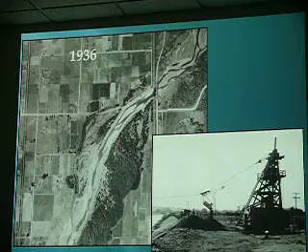And gravel was part of our flood problems. In 1985, there on the left side of this graphic, you can see we had a channel capacity of about 16,000 cubic feet per second. But in 2011, you can see we've only got about 7,500 CFS, cubic feet per second, of capacity for floodwaters. And each year, we've been monitoring this. We survey the channel cross-section, and it's filling in. And so we're losing capacity, and that was certainly evident in what happened in January of 2009.

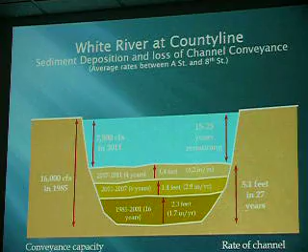And if we don't do anything, and we look at what the existing conditions are for 15,000 cubic feet per second, that's a 100-year flood event, or what we call 1% annual chance flood, we could have water all over this valley, and that's what this graphic shows. This is output from some of our computer modeling that we do in floodplain analyses. You can see that the water would spread out just about everywhere. So that's our current flood risk that we're dealing with.

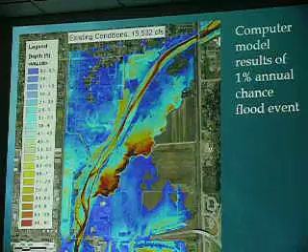And of course, a lot of you went through that flood event in January 2009. There was significant flooding through White River Estates, over 100 homes affected, the Pacific Park area, 4th Avenue, 8th Street, or Stewart Road was also overtopped, and there were some evacuations and rescues there along Butte Avenue and Stewart Avenue.

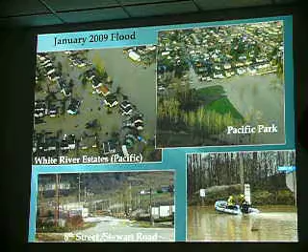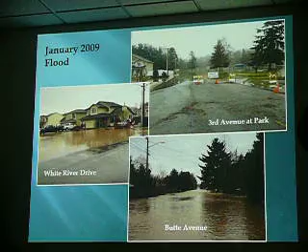Other roads were flooded, 3rd Avenue at the park, all the way along Butte Avenue, that's actually looking south toward Pierce County, and again, all of White River Drive. So these are the types of flood damages that our flood control projects are seeking to address.

Current assessed values of those homes are $52 million, and we made an assumption about contents, and that's another $13 million in damages avoided by the implementation of the County Line project. But as I mentioned, the sediment still comes, and we have to plan for that. We have planned for that in our project.

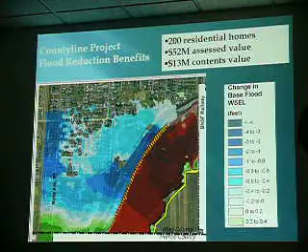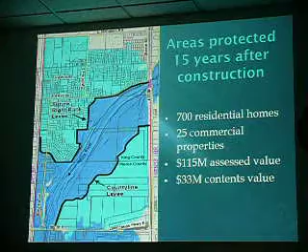So another element about the County Line project that I want to emphasize here is that it has significant flood protection, but it also does a lot of good things for habitat. As I showed in that 1936 photograph, there's a lot of dredging going on, channelization, and as a result, the wetland area and floodplain areas were disconnected from the main channel of the river.

By setting the levees back, we actually regain rearing habitat for spring chinook and steelhead, and in particular, spring chinook is a very important listed species for recovery in the Puget Sound area, and so the White River spring chinook is quite unique and important. Because of these environmental benefits, we also have gotten a lot of good support from funding partners, and I'll talk a little bit about that a few slides down here.

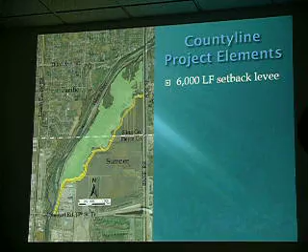And another important thing, again, is the sediment deposition. Opening up the river and giving the sediment someplace else to go rather than just deposit right in a constricted channel is a way to manage sediment and provide storage for it. So I'm going to go through a few components here about what the County Line project is about. Shown there in yellow is the alignment for nearly 6,000 lineal feet of setback levee.

We will also be adding 5,000 lineal feet of what we call bio-revetment along the front edge of that levee. That's for erosion protection, so the channel doesn't migrate into the levee. We also have engineered log jams, that's ELJs. We have 4 of those that are sort of incorporated into the bank with the bio-revetment to help deflect erosive flows. And then we have 4 others, we call them apex ELJs.

Those are the black dots you'll see at the upper end there in the green shaded area. And those help to split flows, slow down velocities. It also is a way to help drop out sediment that will locate behind those engineered log jams. Then we have to go in and actually remove the existing levee.

So the existing levee area is shown there in blue, and that's about 4,500 lineal feet of levee removal, and I think about 30,000 cubic yards of material that we'll be pulling out of that area. And that's just another aspect of taking out that artificial fill that's near the river channel and pulling it out of the way. So again, it opens up, provides room for more sediment to drop out, and actually lowers the flood elevation.

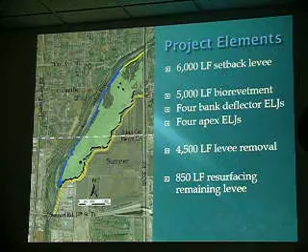And last but not least, at the upper end, shown in yellow, near the Burlington Northern Santa Fe Railway embankment, we'll do about 850 feet of levee resurfacing. Again, this resurfacing is to ensure that that part of the existing levee stays in place, so we don't have an uncontrolled overtopping of that levee that would go in along the Burlington Northern Railway. And it's also to have good flow transition out from underneath the bridges down to where the river will open up into the wetland area.

So a couple of milestones to talk about. This illustration shows a cross-section of what the levee setback will be there on the right. There will be a revegetated riparian buffer, all with native plantings, shrubs, and trees. And as I mentioned, the biorevetment that provides that erosion protection there, it's nestled in along the wetland.

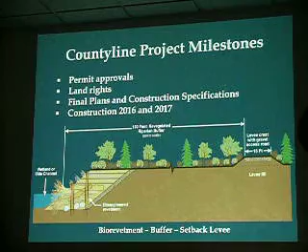We do have all our permit approvals in hand. Just last Friday, we accomplished our last acquisition for land rights, so all land rights are in hand, and we're now preparing the final plans and construction specifications during the summer and fall. So we're ready to go to construction next spring. It is a 2-year construction project. There's a lot of work to do here. We'll be constructing that setback levee first, and then we'll be going back in and pulling out the existing levee.

So as I mentioned, we had some pretty good funding partners going on here. First, of course, the King County Flood Control District, providing nearly $12 million toward the project. The Natural Resources Damage Assessment, or NRDA party, is our most significant funding partner, nearly $5 million. Again, because of the environmental elements of this project, they felt it was appropriate to support us.

We were also able to leverage from the state Salmon Recovery Funding Board grant for nearly $800,000, again because of the significance of spring chinook in the White River. And also Pierce County is a funding partner for $500,000. So we're looking at an estimated project cost of completion of just over $18 million for this particular project.

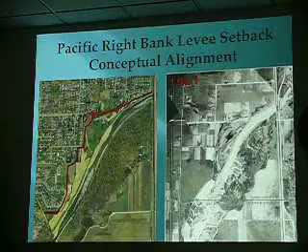So a few more slides. I want to talk about the right bank project. Again, this is in a very conceptual stage. The aerial photograph there on the left is the rendition about where the HESCOs are basically at, shown there in red. Again, just referring back to some historic photographs, you can see how the river has moved around in here. And certainly you can see the image of where the river needs to flow and flood and has flooded.

One of the temporary steps we took for flood protection, as you know, are the HESCO barriers. These are the big green baskets filled with sand. They used to be one row high, and then we doubled them up. So they'll be in place as the temporary flood protection until we can get the right bank project more defined and constructed.

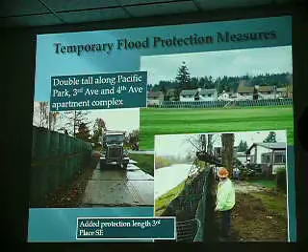So we're in the feasibility stage. We're just basically in data collection. We're going to do some geotechnical investigations similar to what we did on the county line project. We need to understand the types of soils that we would be building upon. We have to look at the variety of different types of alignments that would be best suited to meet all the needs in the area. There's flood protection, there's recreation, park usage, access to the river and floodplain, and all of these types of pieces of information and uses have to come together to examine various alignments.

Some of the areas that we want to look at, of course, is down through White River Estates. We've bought several homes there along the river channel, but we need to determine how to bring the lower end of the levee and wrap it around White River Estates and Government Canal. As you know, Government Canal can backwater with the river, and we want to make sure that this project, in its permanent form, doesn't have an end run of floodwaters coming back into White River Estates from above. So that's where we need to look at that alignment.

Certainly 3rd Avenue and the park and the upper end, we need to take a close look at that and understand what is the most benefit for all parties involved. And groundwater conditions, we've heard a lot about the rising of groundwater in this area. It's another important factor when designing the levee. And as I mentioned, the Government Canal and Butte Avenue levee tie-in we'll be looking at.

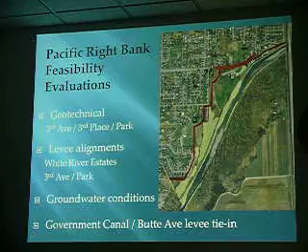Next slide. While we're doing that, we're going to still be monitoring the channel. This is looking at the 3rd Avenue, 3rd Place, behind there with the homes. You can see the gravel is accumulating. This is before the HESCOs were built, so we want to keep a close eye on it. While the county line project goes in, we still need to be monitoring the channel.

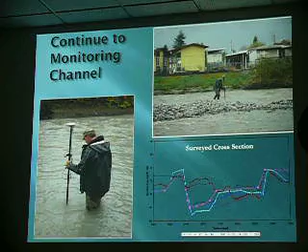So we have a lot of work to do on the right bank. I was hoping we'd be farther along in some feasibility studies than we are today, so really we're just getting started. And we're going to be using some consultants to help us with some of those investigations. We would need to initiate a very strong city and public involvement process as we want to incorporate all input about developing even ideas for different alternatives for this project.

We have continued with acquisitions where opportunities arise. If there are willing sellers and we feel that it's a key piece to a future project, we will go ahead and work with landowners under that situation. We look at the next 2 years to actually go through development of alternatives, work with the stakeholder group and the city to develop a preferred alignment. From there will be preliminary engineering to do design work at a conceptual level, and look at permitting.

Once again, we'll be talking with our folks at Burlington Northern about how we can tie in at the north end. That'll be another critical piece to contain floodwaters. And again, continuing with acquisitions. This is another big project. It will probably take a 2-year construction period, probably 2018 to 2019. And right now, our rough estimate of what the project would cost is somewhere between $25 and $30 million.

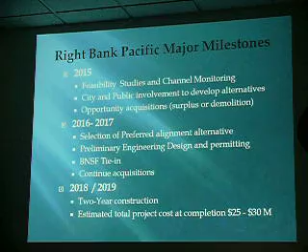Okay, that might be the last slide. So I rambled off a lot of information there. If anybody has any particular questions, I'd be happy to answer or explain anything that I've presented. Questions of council?

A couple of questions. I realize you're not FEMA, so you can't speak for them, but what are you anticipating the impact of all this will be on their flood mapping as far as insurance rates for long-term Pacific? It's a very good question. I wish I could answer it thoroughly, but I'll give you a good shot at it. We work with FEMA a lot. We've done a lot of flood studies in the county, and I've worked on a lot of those.

And FEMA has a new policy out. It's called Levee Analysis and Mapping Procedures. And that particular policy is specific to those types of levees that don't meet full certification requirements. And one of the tricks of full certification is, can you tie into another certifiable flood protection facility? So very continuous level of protection. So if you can't do that, FEMA said, well, wait a minute, these levees are pretty stout. You should be able to get some credit in flood mapping. And so they came up with this new policy.

They haven't quite figured out how to apply it in all cases, so they selected a set of pilot studies throughout the nation, I think 18 or more different sites, to figure out how to apply it and technically work with the information to come up with what would be then a flood map actually showing and accounting for some of the protection of these newer, stouter levees.